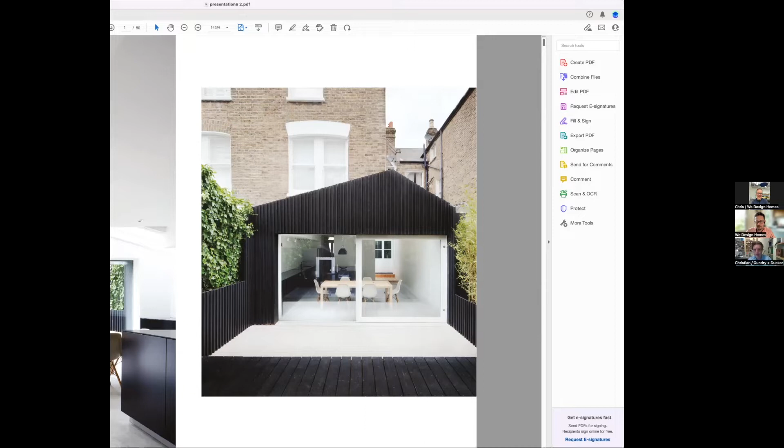I think, Christian, we might have a problem with the screen, the slides aren't moving on us. Oh, I'm afraid they're not moving, got a freeze on. What's happened there? That's weird, maybe it's the internet or something. Let me just try again. I'll stop share. Sure thing. Resume share. It's doing nothing. Tell you what, I'll stop share and start again.

Right, can everybody see, is it moving? Yes, loading at the moment, fingers crossed, people off the internet. There we go, is that working? If you flip the screen, is it moving? Just advance the slide there, Christian, see what happens. Yeah, I'm moving backwards and forwards now. No, I'm not getting any change here. I'll just make sure, there we go, it's off the internet, just taking a while to load, that's all. Okay, so has it gone to the next slide? It had, and now it's gone back again. Okay, are we on the slide?

Yes, success. Okay, so this one I've already talked about. So can you tell me when you get to the next slide so I can continue.

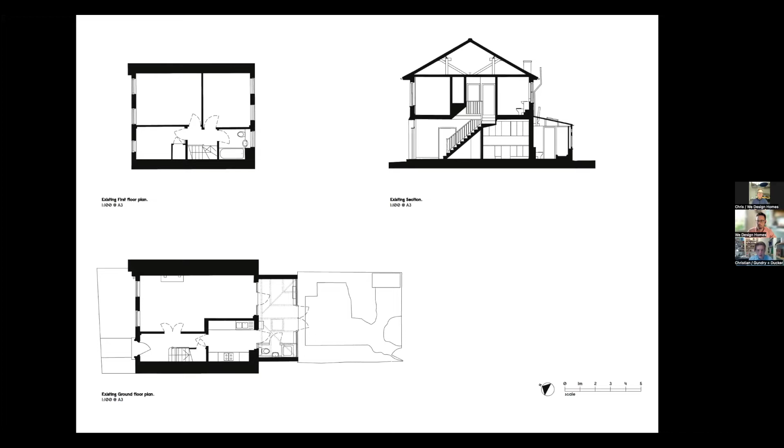So any project that we do is a mixture of the pragmatics, which are simple things like that - when you come in the house, where do you put your coat, where do you put your shoes, where's the boiler go, where's the downstairs loo go - and then we try and mix that with a bit of magic, basically, a bit of thinking about how people move through houses, about what's the nature of the interior, how do you take what's a completely standard house and do something special with the interior.

So this page here, I think, is the page with the 3 plans - is that up on the screen yet? Yeah. So a typical conversation we'd have with a client is we'd start off with a series of images of things we like. We often invite the client to share stuff that they like. Sometimes people have a lot of stuff, sometimes people say, well, you show me the stuff.

And then we'll work on plan layouts. So when we first started this project, we offered the client various layouts, some really simple, so somewhere we'd almost retain all of the house, and some much more involved. As it turned out, the one we went for, which is the one at the bottom, is actually more or less what we actually built in the end.

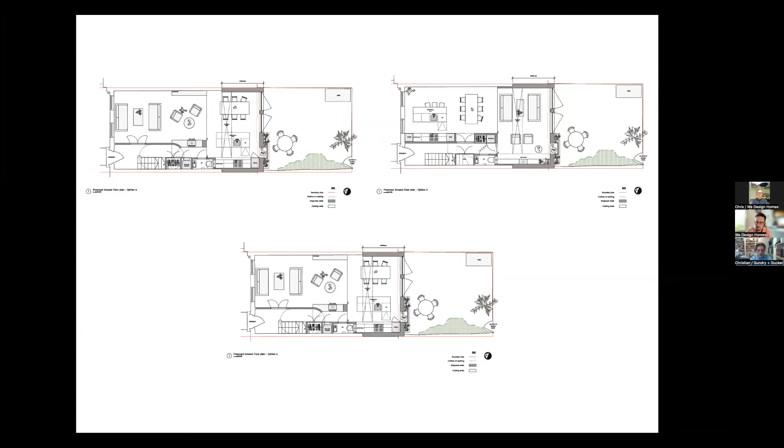So the next slide, this is just an example of a sort of document that we produced where we would talk about images, and we'd talk about ideas for spaces and materials and things like this.

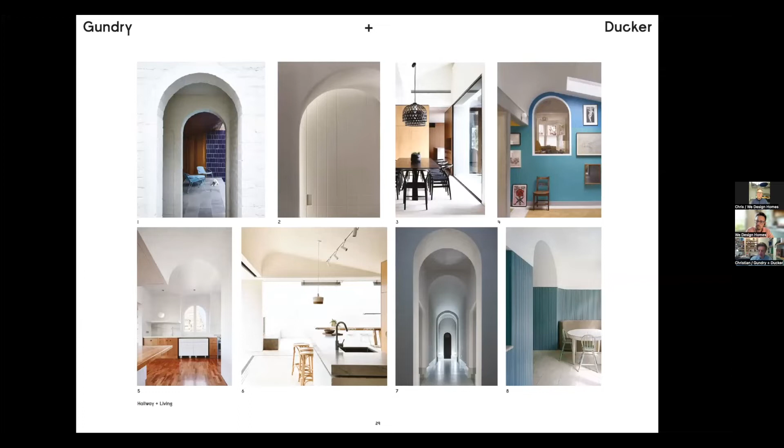One of the elements of the brief at this house was that the client wanted 3 bedrooms, and the only way to do this in this sort of house is to change all the floors around. So it was a 2-story house with a storage loft. We thought, well, the only way to do this is to move everything around so we can get 3 full stories in. And having thought about that, it brought up the whole opportunity of, well, we could remodel the whole of the inside of this house - we don't need to be constrained by where things are at the moment.

Obviously, because it's a 1970s house, often the discussion with a Victorian house is there's Victoriana, like marble fireplaces or handrails or doors that you might want to preserve and contrast with, say, a modern extension on the rear. But with this house, there wasn't really anything that we wanted to keep, other than the facade, which you couldn't change.

So doing this, we thought, well, this is an opportunity to play with the space and try to create some contrasts. Someone said about this project that it's like a country house in miniature, and I really like that comment, because even though it's not a big or unusual house, we try to introduce moments and things we've brought from looking at history or much more grandiose, important buildings.

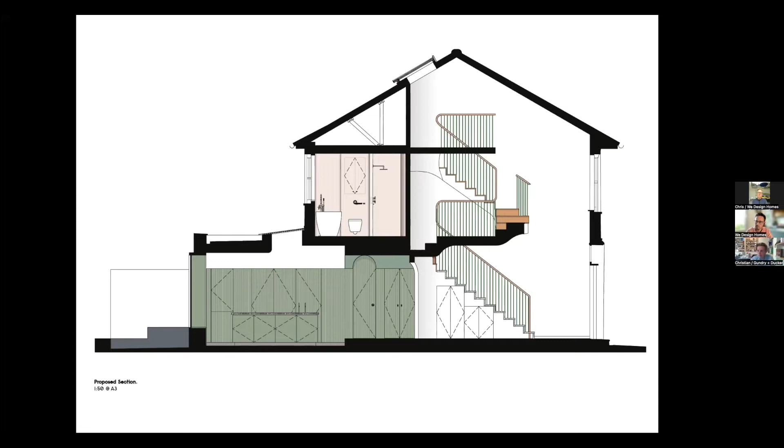So the plan we came up with for this house is quite simple. In parallel with ideas about how we make space or lighting, there are really simple things too, like how can we fit in all the things you need in the modern day, and where can we put them. So this project has a little bank of storage, you can see I'm circling with the mouse.

Presumably we're on the slide with the checkered floor by now. Yeah, we are. Yeah, okay.

So there's a whole bank of stuff. We've got a room for coats, a little laundry space, a downstairs loo, somewhere for the meters, and then a storage area for the kitchen. That's managed to really efficiently package all the things you need into one space, so we can leave the rest open for nicer things.

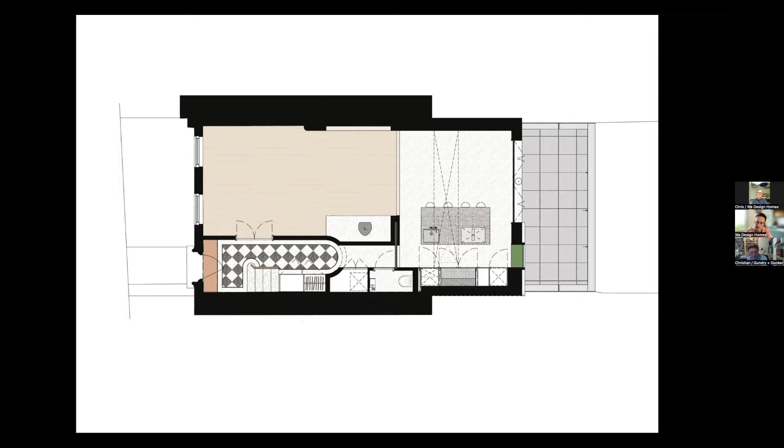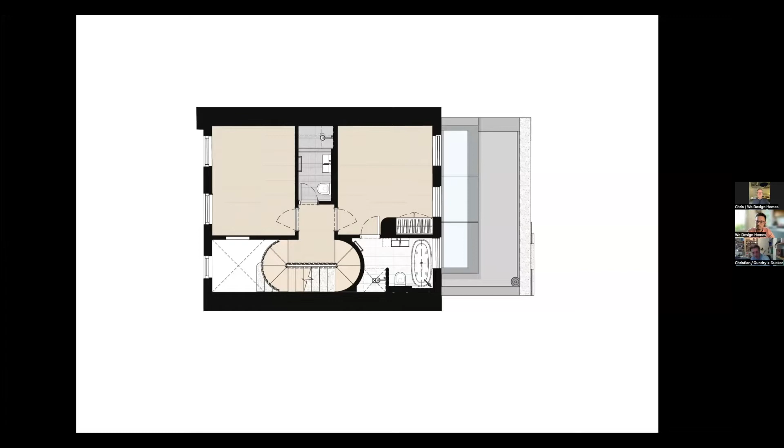And with the space we saved, we were able to make this into a triple height space at the front. As you go up the house, you carry on in this little staircase, and there's a room at the top with a little loo. So that's the planning.

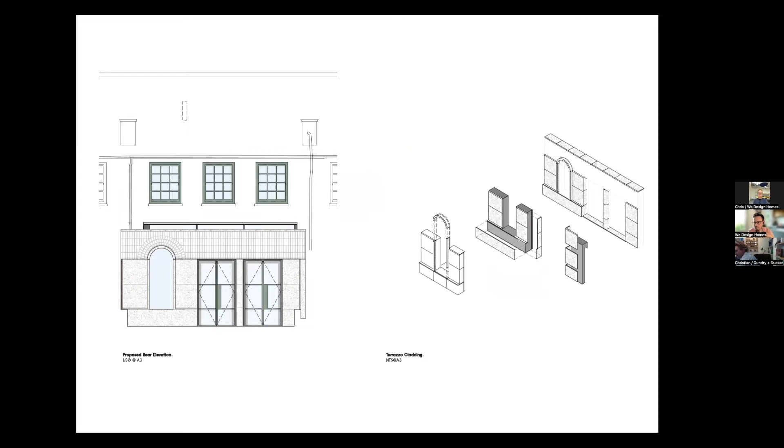I'll come to that later when I talk around the photographs. This is just a little diagram of how the facade is made out of pieces of terrazzo. Again, we like to make lots of models and things like that, so this is a little model which I've actually got here, made to show the experience of how you come into the house.

So basically, it's about that you enter through a very modest little doorway, a simple little doorway with a rounded top that was already there. And the idea here is that you then enter into this very tall space, which is triple height, all the way to the roof.

We actually wanted to have a roof light at the top, but we couldn't get planning permission for that, so it has to be a roof light at the back. And one of the key ideas here is that when you come in, there's a view all the way back into the garden from the front door. This big lump here, where the tunnel is, is where all the coats, the shoes, and the meters and all that sort of stuff is hidden.

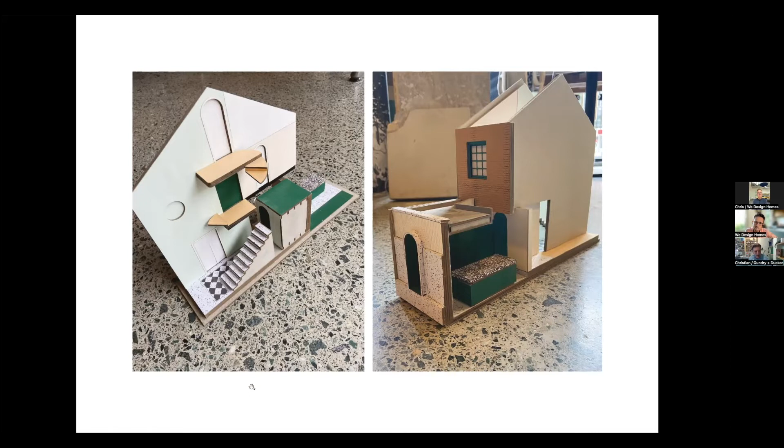So nice, I'll just move to the next project. So again, now we're on to the site stage. So here's your house, that's the old staircase, and this is a new structure. We built a new steel frame inside the existing house to accommodate our 3 stories inside the old 2 stories. Obviously, when you're doing this stuff, you want to keep as much of the old as possible.

As you can see, the old plaster on that's fine, you don't want to throw it away. We start to build the stair, you can see that's winding up through the house.

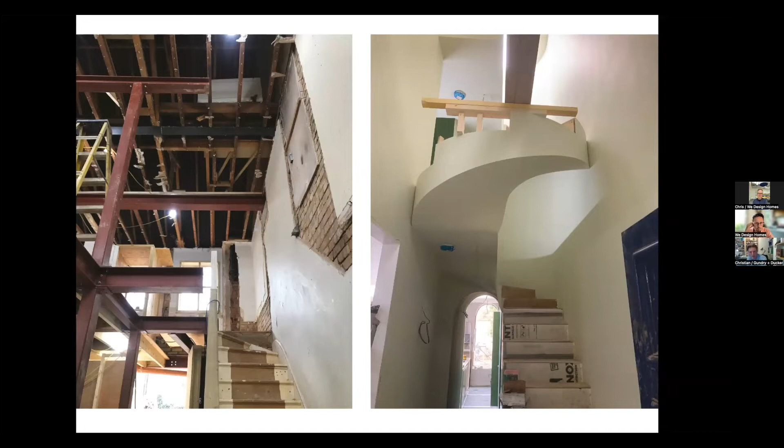I'm just going to the next one. So then I'm just going to move on to the finished photos. Can people see the one with the arched door? Not yet. Oh, there we go. Yeah, okay, yeah, it is.

Before we go through to the final photography, how was the conversation with the client talking about this triple height space and taking away essentially floor space? Because I know some people are always quite apprehensive about doing things like that.

Well, what we tried to do in a way, because we took an unused loft, and by moving the floors around, we made that into a habitable space. And by making the layout on the first floor a little bit more efficient, we sort of grabbed a bit of space there.

When we first talked about it, we presented some options from the very conservative to the more radical, and it was a conversation that developed - okay, the space we've lost on the box room is a tiny amount, and we've much more gained the space back with the much bigger back extension and the loft, and being clever and very efficient with space.

I think this house is incredibly efficient with space in the way that we can accommodate a lot of the storage - even the bottom tread has got something stored underneath it. So there's not a millimeter of space wasted in here. The little loo under the stairs is exactly the right size. And this spiral stair is a really efficient little way of introducing a stair into a house, a sort of semi-spiral stair.

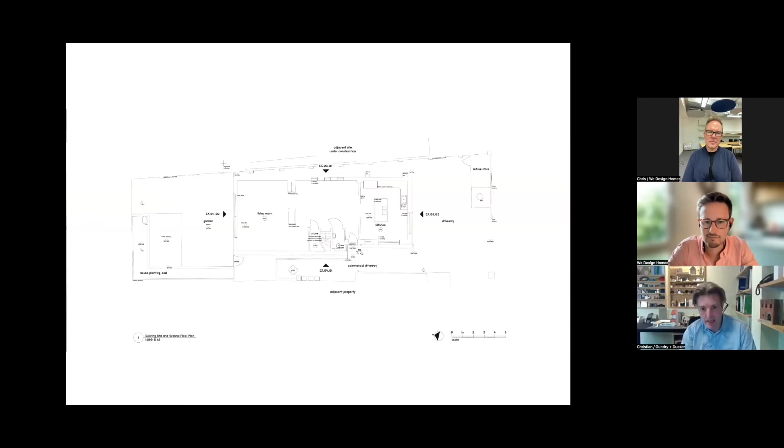So what we thought, well, there's a sort of classic plan, an arts and crafts plan from basically the Edwardian era, where you have a house and you say, okay, I'll take the rooms that face south, or the rooms with the best view, go one side. The rooms where maybe the sunlight is less important go on the other side, and then you have a big open space in the middle, which is the hall.

So does this plan come up, actually, the big plan? Yeah, I'm not sure what people can see. So as you can see, we took the plan, and again, it's the same discussion about, you know, open plan is good, but maybe you need a relief from open plan. Maybe too much open plan is a bad thing. So we added - and the other issue with this house is how we deal with its appearance, which is really odd, this sort of wooden box. The house is actually made of concrete blocks with wood stuck on the front. So we added a little porch at the front.

Again, that's another bit of our story. So this time you enter in quite a small little room. In the middle is a really, really big double height hall. At the left is a sitting room, a dining room, a kitchen - again, a big open plan space. And this looks onto the garden, and then the garden looks on other gardens. Eventually, after about 30 gardens, you get to Wimbledon Common at the back.

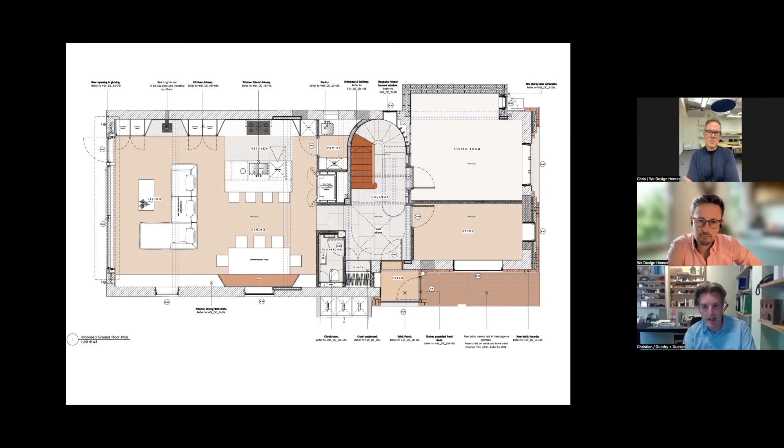And then on the upstairs - the other thing I have to say is we've added lots of little extensions where we could, so we pushed out on the side here, a little extension on the back. Upstairs it's quite simple: the top of the hallway, bedroom, big master suite at the back, dressing rooms, and a little ensuite for the main bedroom.

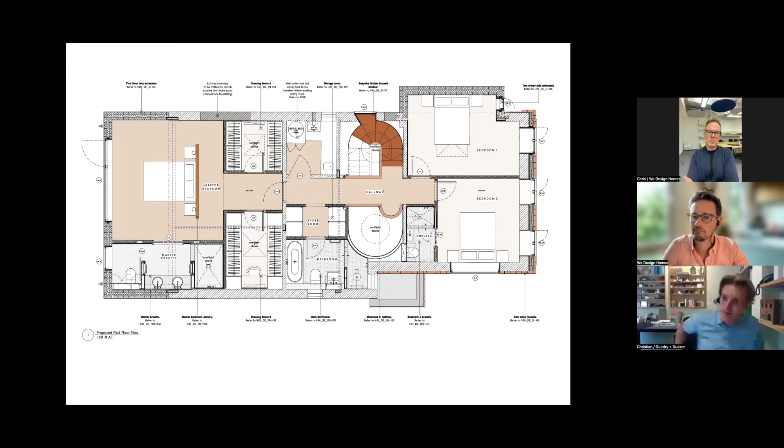So then the next thing is, when we were talking to the clients, we sort of said, oh, let's go for a walk around, you know, some amazing streets - this part of Wimbledon, really amazing Edwardian architecture. So he said, oh, I want to look at other stuff, I want to look at, you know, there's all these beautiful houses. So we sort of said, well, what is it about these houses? What is it in this era of architecture - the sort of symmetry and asymmetry and the expression and materials.

And we had a conversation and just go, well, you know, we could build a replica of a house like this, but with the budget, we can't - we don't have the budget for those sort of craft skills. So we thought, well, let's take some themes, let's take some ideas from these buildings, and let's try and make a modern version that can be constructed by everyday building materials, basically.

So this was the two sides of the coin. The first side of the coin was introducing some drama into a barn, splitting a barn into spaces, and the second was about how we remodel the facade. The remodeling of the facade was a very straightforward thing - literally building a new wall in front of the old wall of the house. So we dug a foundation in front of the existing house. We just built a new front on.

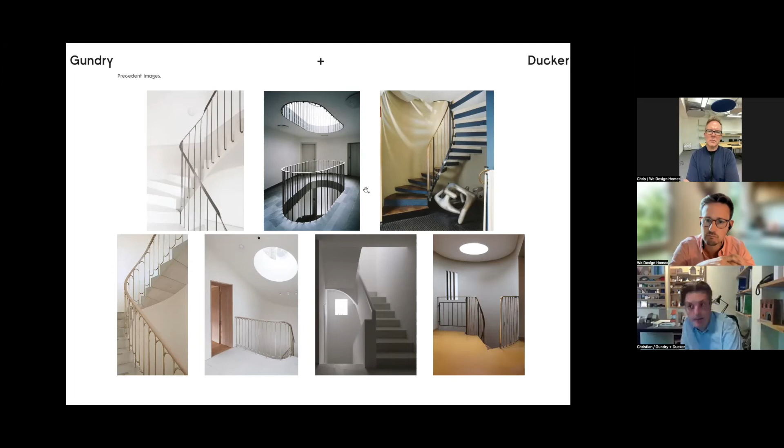As a house with lots of external wall, we tried to make it as cheap to run as possible. Again, this is from an early presentation. So we were looking at forms of staircase here, ideas of how to light staircases, sort of forms, similar to the last project.

Again, the idea of a staircase. Some of these are contemporary stuff, some of these are from great classic buildings from history. Some of it depends. And then the real difficult thing to crack on this was the facade, so we did a lot of work on this.

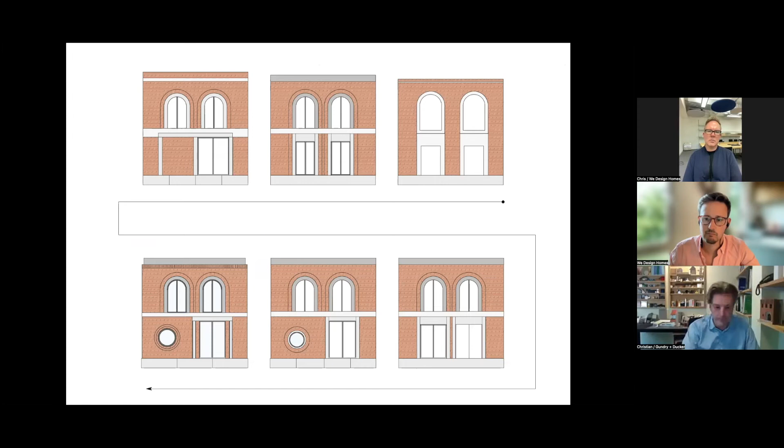This is just a sheet, I mean we had all sorts of models - a model of the building, and we had different fronts we could take off and put back on again, and all sorts of stuff. So this was a real difficulty trying to come to a design that was buildable by a normal builder, didn't require lots of special stone cuts.

And that worked with the peculiarities of this house, where people pass by the front quite closely - it's a busy road, there's people looking in, lots of issues. This is page 2, I don't know if that's come up yet. Anyway, this is page 2, where we're trying to refine the design a little bit more.

And then this page here, this is sort of where we make a model. This is not the model with the removable fronts, that was a different scale of model - this is a little model. This is where we're trying to come to a bit of a resolution with the design. The little grey thing on the side is actually the extensions we added on, which are just made of render, as an economical method of building.

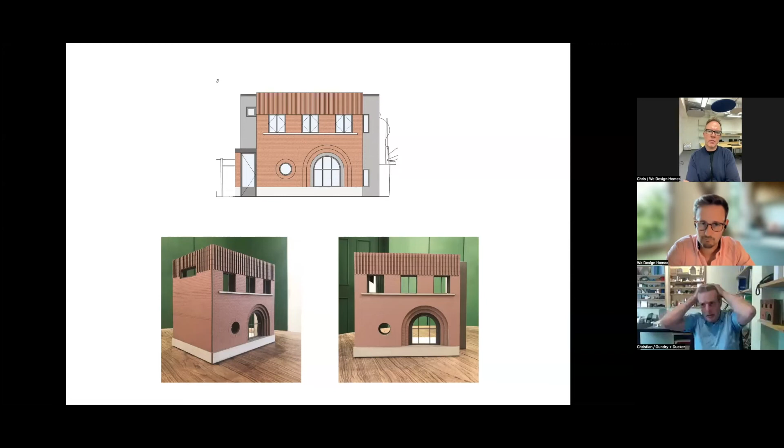So then this is - does this come up as the photo image? We're still on the model, yeah. Oh no, the renders are here. Yeah, the renders. Okay. So this is where we sort of finally came to - this is the image of the front of the house. As you see, we were limited by the rather squat proportions of the host building.

Actually, I got the modeler to remove the big bush here. So although this is a busy road, the bush shields this window, which is the TV room. Then this window, which is very exposed, is quite a little window, and this leads on to the study, because other people who live in this house can pass across the front here. This is the porch on the side, and these are the bedrooms at the front. The stripy top was actually the client's suggestion.

So that shows you - actually, at the time I was a bit like, I'm not sure about that. But then when we actually drew it, I thought, oh, that's a really good idea. I really enjoy that, that's really nice.

And there's a funny story about this. What happened with this project is we tendered it just before COVID, and when COVID hit, the client said, 'I'm thinking of selling up, going to live on the coast, and just getting a one-bed flat somewhere in London.' So I thought, unfortunately the project's cancelled - oh, that's a real shame. He put the house on the market, and we thought, well, we need to get something - we'd spent so long on this project, done all the drawings, got the tenders back, ready to start. So we just commissioned some renders, this one and another one, and put them on our Instagram account. The client saw them and thought, actually, I really like it. So he said, I'm going to build it now. So that was a good thing, you see.

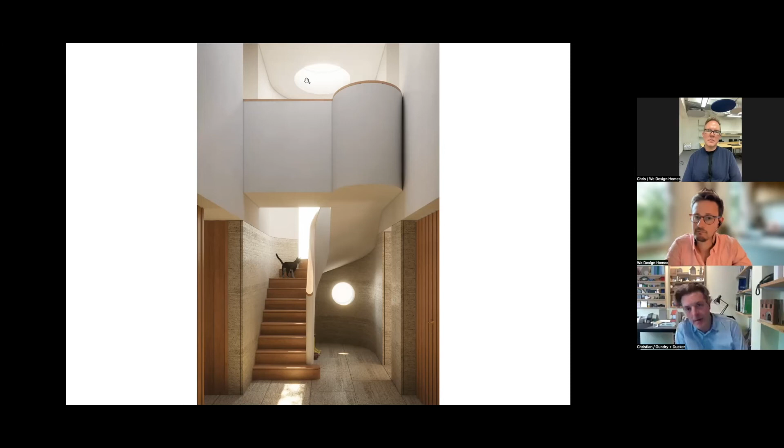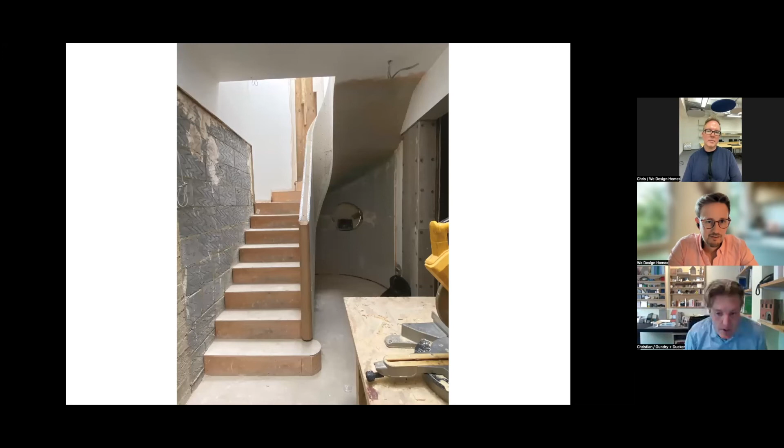So when you're in this space, which is now being built, the staircase is really, really bright. The space behind it is slightly darker - again it's about these contrasts. So just to finish off very quickly, this is it being built, this is it in construction. Again, none of these projects are super big budget, so they're all achieved with quite simple materials - bits of wood, bits of plywood, bits of plasterboard - trying to be clever with ordinary materials to make something impressive.

We have, luckily on this job as on the last job, really, really good builders, some really skillful tradesmen, and very good conversation with them. You can't achieve things like this with bad builders who don't want to have a conversation - it has to be a very collaborative process, basically. And you can't achieve any of these things without the client's support 100%, because you'll hit things along the way. So it's really important the client 100% buys into everything you're doing, and you have a very cooperative builder who's as keen on the result as you are.

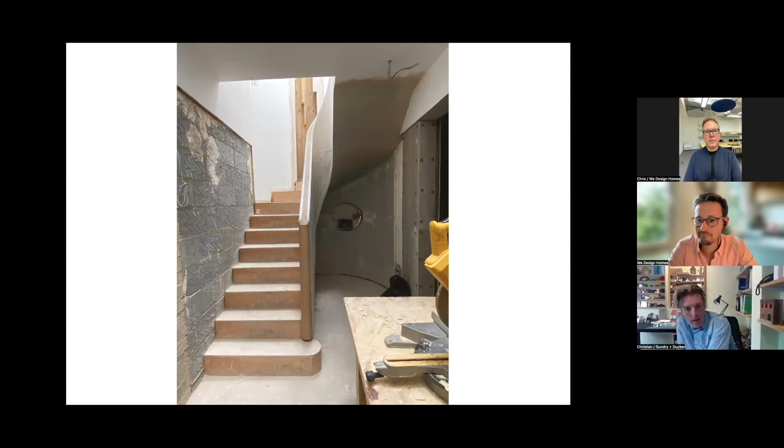So the idea of this is it's somewhere to stand to talk to people downstairs, or you might have a little chair here perhaps, or you can look over here and see who's at the front door, or even you might step in there if someone wants to pass you.

Again, this is another view - the little sort of balcony touch here, again the stair. Unfortunately I don't have any images of the front because the house is built so close to the boundary, it's really bang up to the hoarding. So this is all I've got, which is a little view of the round window here.

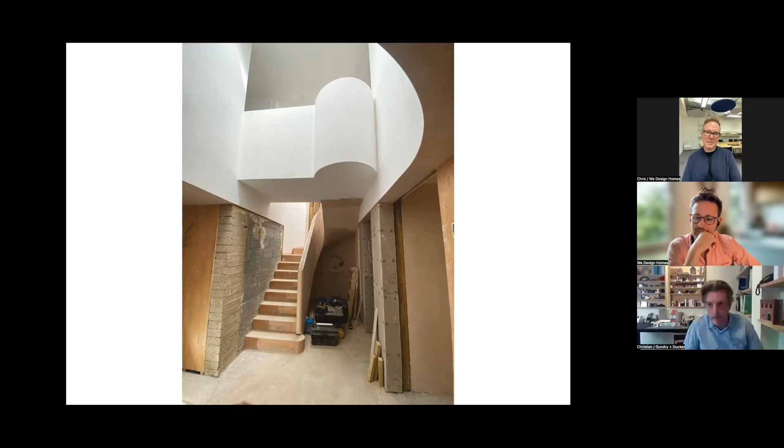Sorry about the delay. I hope what I was talking about matched the slides, which maybe it didn't. I don't know. No, we got there. Okay, that's fine. Okay, and good.

How was the planning process with such an ambitious facade? Well, I mean, at the moment, all planning processes are terrible because of...

The planning, just because post-COVID, I mean, this is actually pre-COVID, the planning went on for a long, long time, but for no other reason than there were numerous planning officers and people kept leaving.

The only suggestion we had from the planning officer when we originally drew it, we showed red bricks, and they said, 'Oh, change it to purple bricks to match the next door building.' And actually, they were right, because it's much nicer in purple bricks than red bricks. Apart from that, they didn't really have anything to say, to be honest. I mean, but that didn't stop it being extremely lengthy, but there was no reason for that.